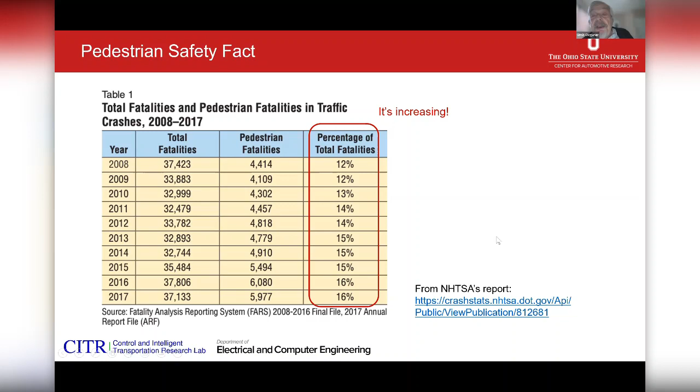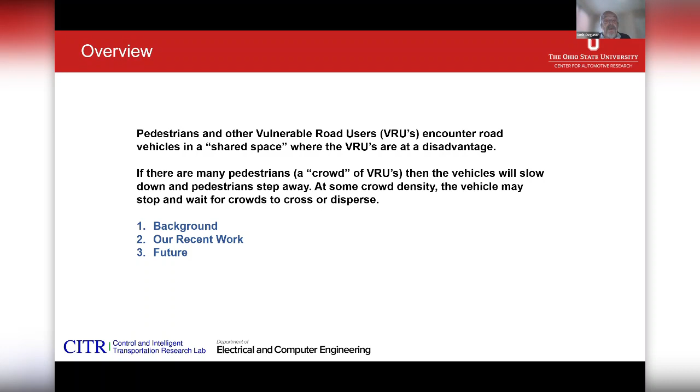Now, pedestrians and other vulnerable road users, VRUs, encounter road vehicles in what we call a shared space, where the VRUs are at a distinct disadvantage. If there are many pedestrians, a crowd of VRUs, the vehicles will slow down and pedestrians will step away. At some crowd density, the vehicle may stop and wait for crowds to cross or disperse.

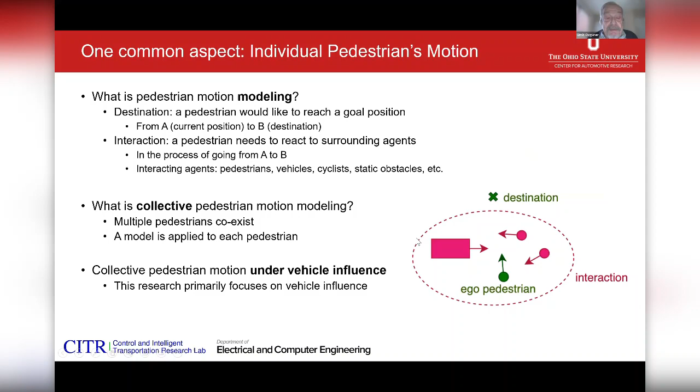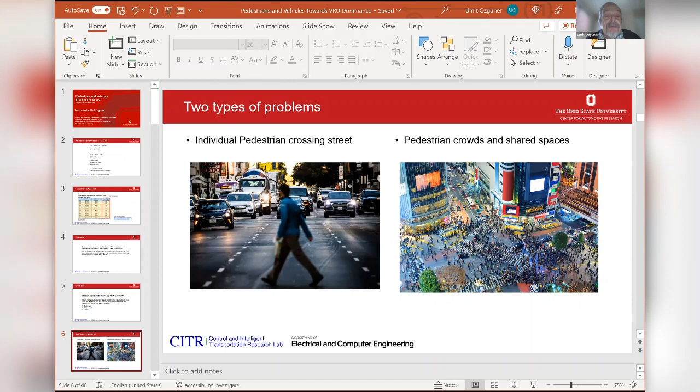Okay, this seems to be going faster than I'm talking. Is that automated? Interesting. We don't have any control over the slides, Umit. Okay. Apparently I don't either. Let me see if there's, okay. Oh, maybe I'll just have to keep in this mode. Is this okay? Can everybody see the slide? Yes, we can see it. Okay. Timing seems to be now in my control.

Okay, there are two types of problems that I'd like to address. Before that, let me go back one slide and say that the talk will be sort of three parts. I will have to go over some background work we have done and reported before. So some of you may, in fact, have seen some of the slides that I'll present, but it's inevitable that I have to rely on some of them to point out what we have been doing recently and my thoughts about the future. So after the background, we'll talk a little bit about our recent work, and then have a few thoughts about one possible future.

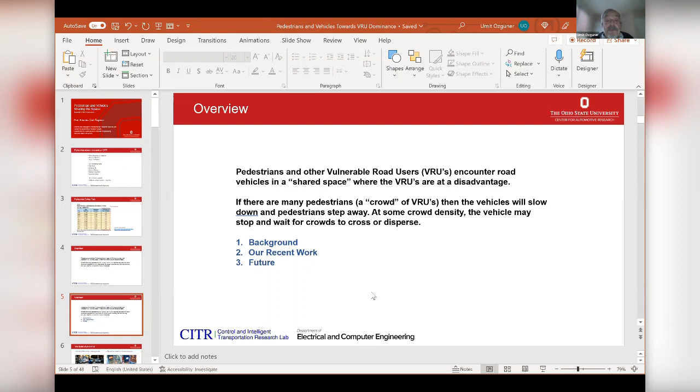Okay, I'd like to distinguish a little bit about individual pedestrians crossing the street type of operation, or attempting to cross the street with a lot of cars, and then pedestrian crowds in shared spaces.

In that picture on the right side, you see a lot of pedestrians, and it has even reached the point where the pedestrians kind of dominate the space, and the cars, which look quite threatening in the picture on the left, pushing the pedestrian to run across the street. But on the right-hand picture, it's the pedestrian's world.

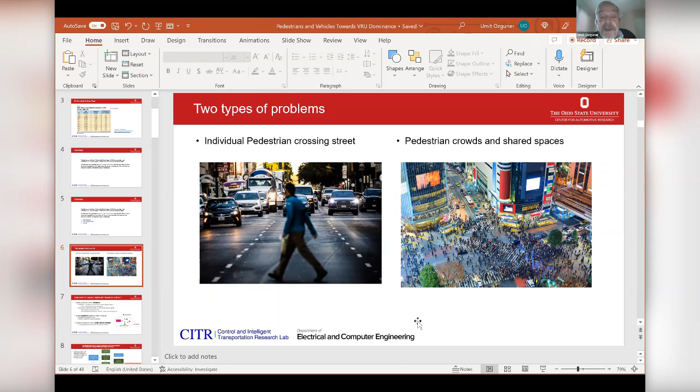So how do we get from left, and how do we solve the problems on the right, is a problem that we'll look at. So one common aspect is the individual pedestrian's motion.

We will be modeling a pedestrian where it will have a destination. A pedestrian would like to reach a goal position, and it will interact with not just the approaching vehicle, but also possibly other pedestrians that are moving with it, if there indeed is a group. So we'll look at what collective pedestrians' motion is going to be, and how that will change under the vehicle's influence.

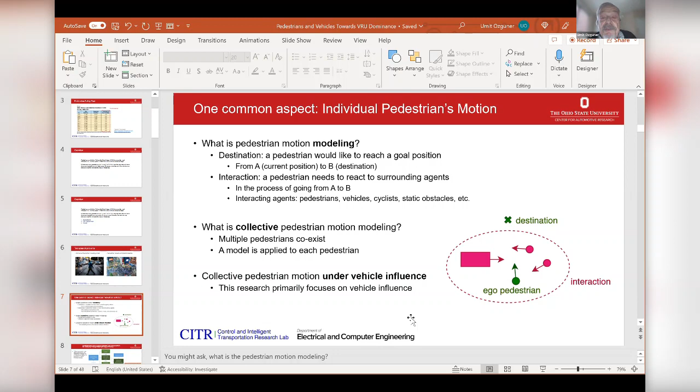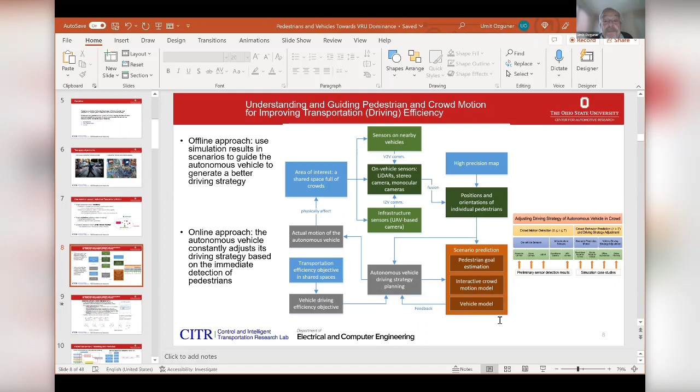Okay, again, this looks like a busy slide, but it's kind of a summary, and I'll address some of these in separate slides later on. One thing I would like to point out is this little figure on the top right corner, where we have one way, kind of a simplistic way of seeing the effect of a vehicle's framework sort of affecting the pedestrians that may be surrounding it.

We're interested in this because we're interested in scenarios where the vehicle, as you see in the sequence of figures, may be going into a crowd, that crowd having maybe one, maybe two destinations, and moving at a specific angle with respect to the vehicle and the vehicle's trajectory. Again, I'll give more detailed versions of this. This is just sort of a summary of where we're going.

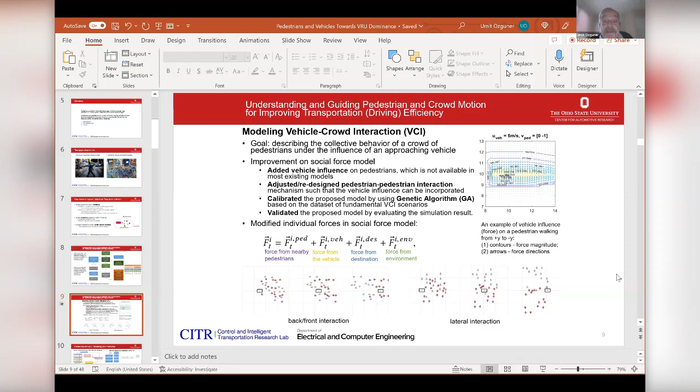Okay, the pedestrian's behavior has to be considered. There are various ways of looking at that. We can estimate its behavior using various modeling approaches, social force, or just online estimation and trajectory determination.

We can make assumptions about how one pedestrian affects another, and how, of course, they both are affected by the car. And you can see our model of the car here, and the model of the effects of the car on the pedestrian here, on this simplified figure on the bottom left corner.

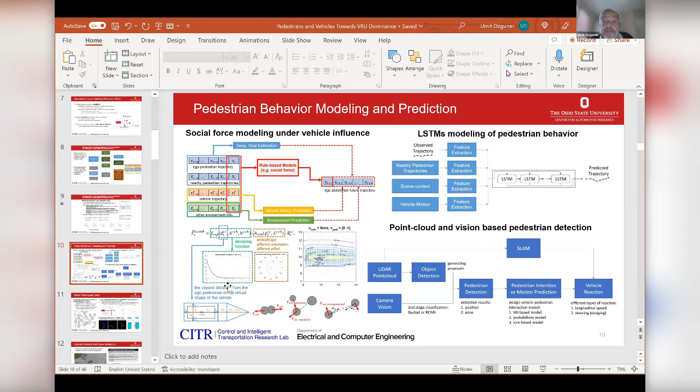Next comes the motion planning and control possibilities for the car itself. This may be different when we have a single pedestrian walking across our trajectory, or there could be lots of them, and we have to plan our trajectories accordingly, or just stop and wait. Again, I'm going fairly fast over these, summarizing earlier work, just to see what setup we have been considering.

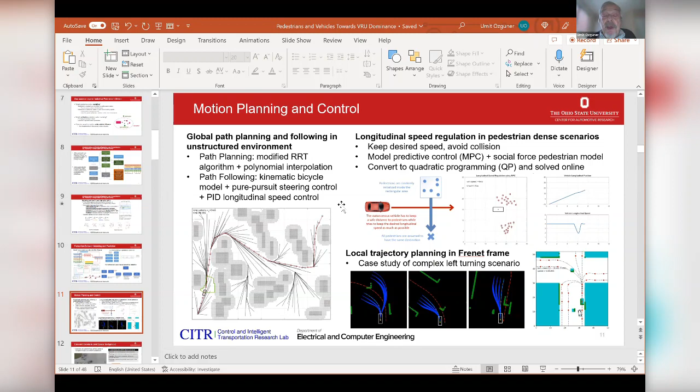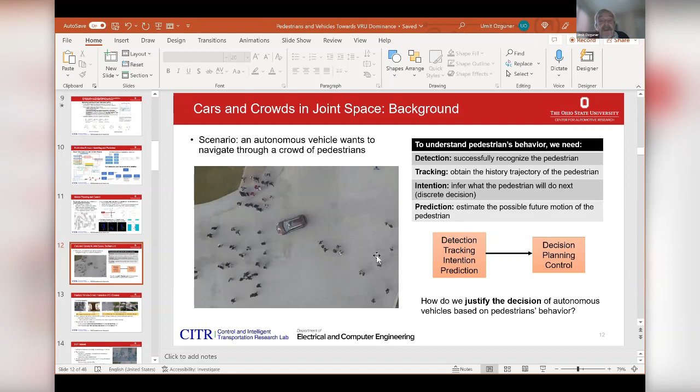We have had an interest in cars and crowds of pedestrians for a while now, and this has led us to try to get some data on such behaviors, so that we can take a look at data collected and decide how to fit dynamic behavior attributes to each pedestrian that's coming in front of us or near us as a car. So we have to do detection, tracking, intention prediction, and this will affect our control for the vehicle.

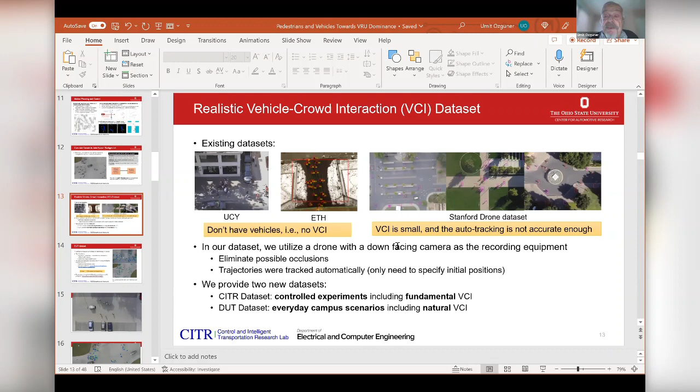Let me talk a little bit about the data sets we established. We established some data from experiments that we did in our backyard, so to speak. And then one of our postdocs that returned to his country in China from Dalian University of Technology did some data collection there and got us some nice trajectories that we have been using since then.

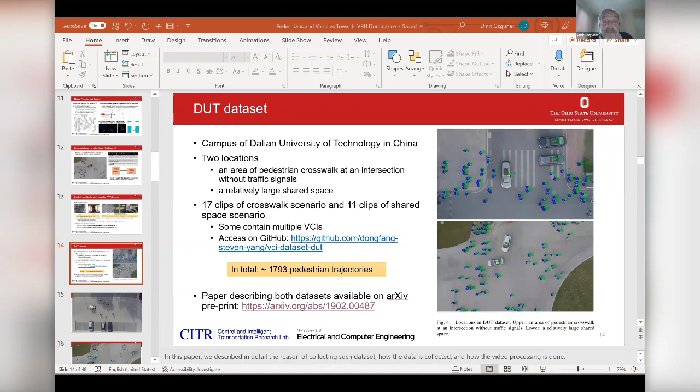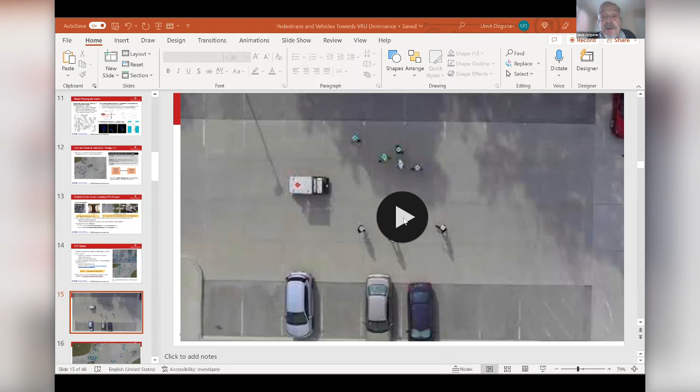With that, let me first show a little bit about the data set we generated at the Ohio State campus, in fact at the parking lots behind our lab, and hopefully this will work.

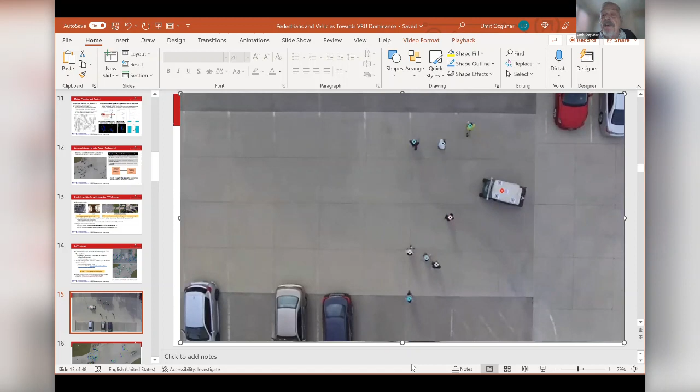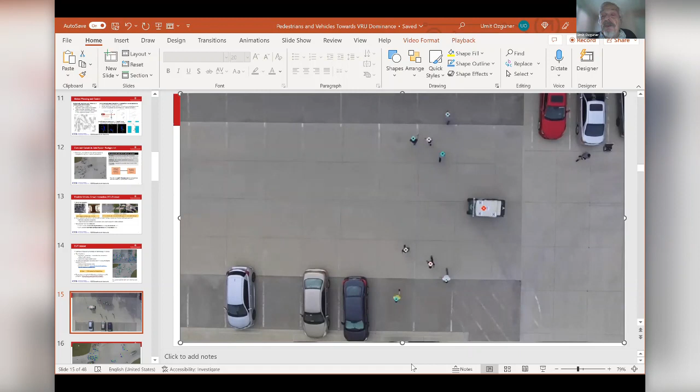These are all students from our lab and a vehicle being driven through them. You can see that the pedestrians sort of disperse as the vehicle is going through them. Now you may say that everybody's conscious that this is an experiment. On the other hand, there's nothing particular that will change their behavior from the natural behavior. So that was the type of data that we collected.

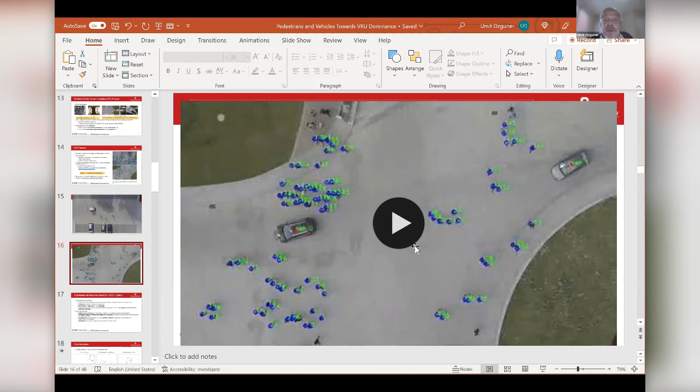Let me now go through the data collected by our postdoc in China. This is a more interesting case because the participant pedestrians are not coached or aware of what's going on, and there's a lot of pedestrians. One thing to observe is that the pedestrians almost dominate - there are some that step away, and there are some that don't and expect the car to slow down and wait anyway. So let's take a look at this group.

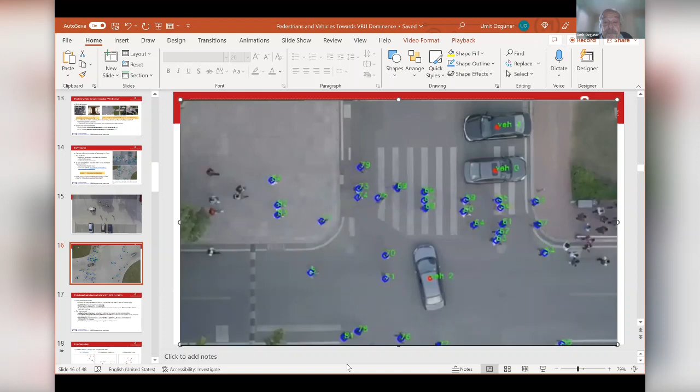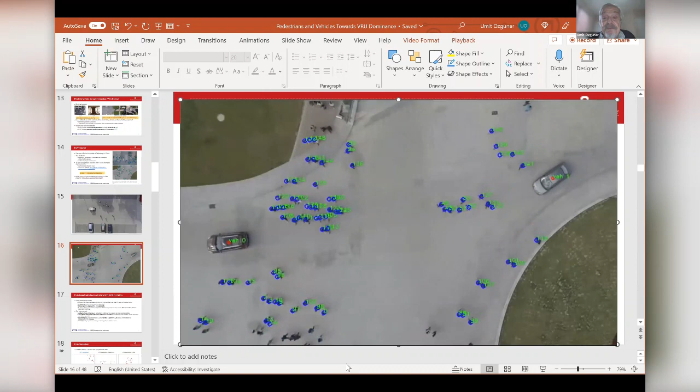You may even notice one case where one of the cars kind of moves away from the pedestrian. As you can see, the pedestrians don't seem to be too perturbed by having a car amongst them. Here's one where the car actually moves a little bit away, and here you can distinctly see that the car makes a slight motion away. Right there, yeah. Well, I always enjoy seeing these behaviors.

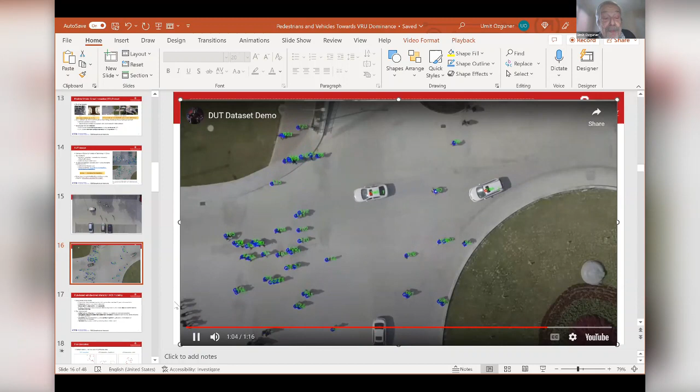Based on all of these, we can provide a social force model, as it's called. It's the origin of all other rule-based models, still popular after more than 20, 30 years of its introduction, and it's frequently used in crowd motion simulation. It has explainability, adaptability, and scalability, and in theory fewer parameters means less amount of data for calibration and training. We added the vehicle influence into that type of model, adjusted and redesigned the pedestrian interaction mechanism, calibrated it and validated it. This was done as part of the work we did for this UTC.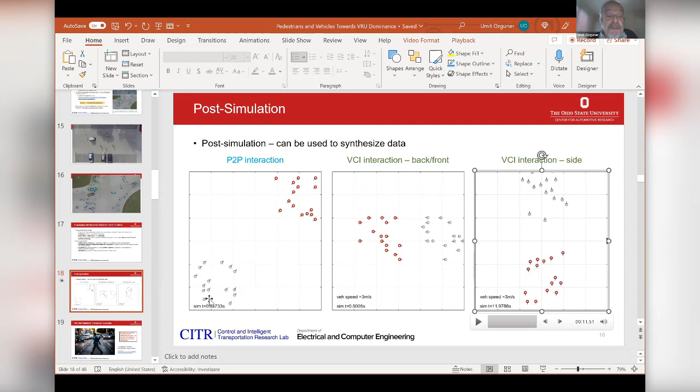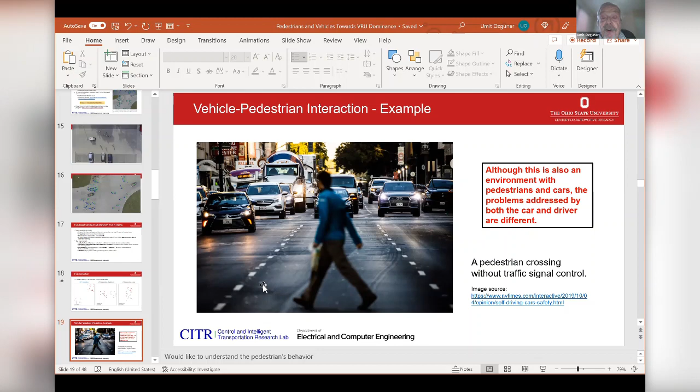Okay, now I'll step back and take a look at just a single pedestrian trying to cross the street and a bunch of threatening cars moving towards it. But of course, one has to start at the very beginning, which would be just a single car approaching a single pedestrian.

And the pedestrian is at the waiting area and has a destination across the street. There are sort of three phases of this operation: going to the waiting area, deciding to cross or yield, and then crossing the road.

It has to find the right moment to cross the road and has to hopefully make sure that it's not hit by a vehicle. This is from the pedestrian side. You can also look at the problem from the vehicle side.

We're assuming a longitudinal motion only, so there is no dodging. Avoid the crossing pedestrian, keep the desired speed as much as possible. So in the simplest problem, this is what we have to solve.

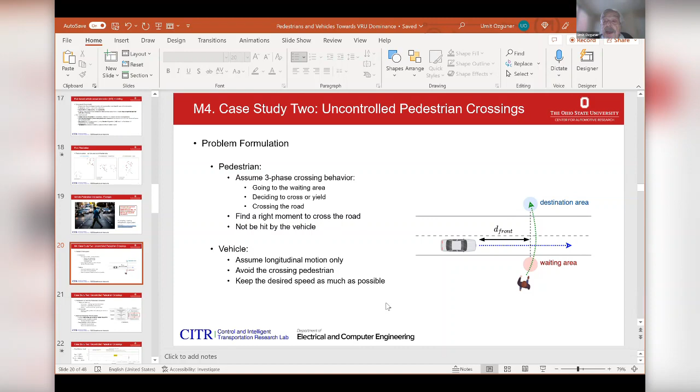So there is the framework for the vehicle pedestrian interaction that let's talk about first. We're considering a three-layer architecture: there's a perception, there's interaction, and then there's the motion. And you can see various things here from the pedestrian. The assumption is the physical states, position, velocity, are known to each other.

We use a modified pedestrian motion model called the multi-state social force model. We added a state transition module, crossing decision-making, and simplified the vehicle influence. So let's look at this little framework here.

From the vehicle side, it has to do a pedestrian motion predictor, has to do its own longitudinal speed control, and of course it is governed by the vehicle dynamics. From the pedestrian side, the pedestrian has to do gap estimation, assuming there's some distance that it'd like to see before the car is totally on the pedestrian.

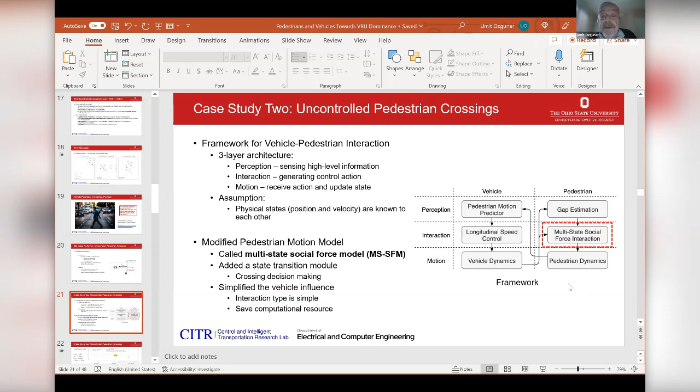If there is more than one pedestrian, then we have to do multi-state social force interaction. Would you be pushing the other guy away? Would you be following it? Would you be trying to hold hands, or what? And of course, the pedestrian dynamics governs what happens accordingly. So that's the general framework of crossing the street.

And we did a number of experiments. Let me show you sort of what is happening. Vehicles approaching and the pedestrian is crossing. And we have done a ton of variations of this, both from the vehicle standpoint and the pedestrian standpoint,

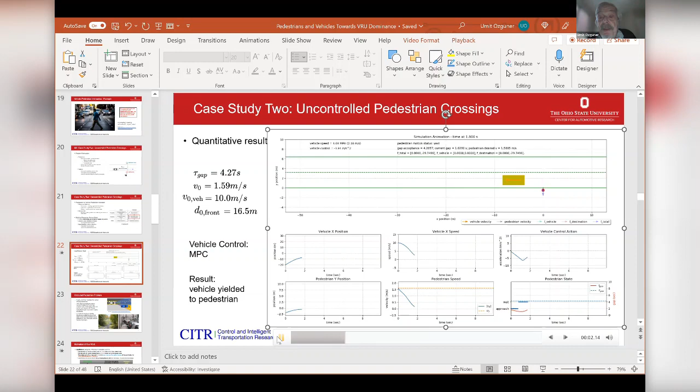and have observed various different types of behaviors. I'm just showing you a single pedestrian and a single vehicle. You can add more vehicles, you can add more pedestrians, and complicate things with multiple lanes and other threatening situations too.

Okay, a little background also on the occluded pedestrian problem. What you've seen in the couple of slides before this was pure crossing behavior. We do have what we call the occluded pedestrian problem also, where we don't know that a pedestrian may be coming. And this is quite a common situation.

One of the cases we looked at, in one of the many autonomous taxi test exercises going on around the world, we were involved in one of them, and there was a lot of concern there about occluded pedestrians that may be emerging from behind vehicles.

And there was especially one case that the car manufacturer was very concerned about: driving in front of a school, and that some small children may run out from behind cars. So that sort of affected our thinking about some of these problems. I'll return to that point in a little bit.

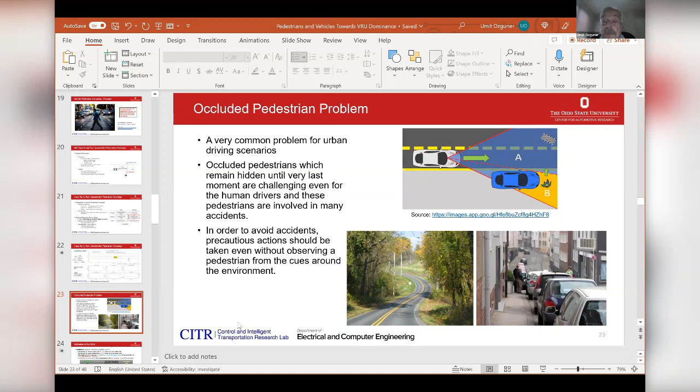So here is a problem that we looked at for a while. What should the automated car driving along the street do when there are a bunch of parked cars behind which pedestrians may be lurking? The density of the visible parked cars and distance to the closest one may be known. The density of visible pedestrians and distance to the closest one may be known. And the distance, if there is also a crosswalk, if it is visible, can improve the performance of the controller for occluded pedestrian scenarios.

And we deal with the emergent pedestrian problem, where you have to estimate the probability distribution that a pedestrian may emerge. Of course, this probability distribution may be unknown or not very reliable, and may be biased depending on the time of day and certainly the location we're at. If there's a school right behind this, whether there's a pedestrian crossing or not, the school behind certainly biases the probability distribution and our attention to it.

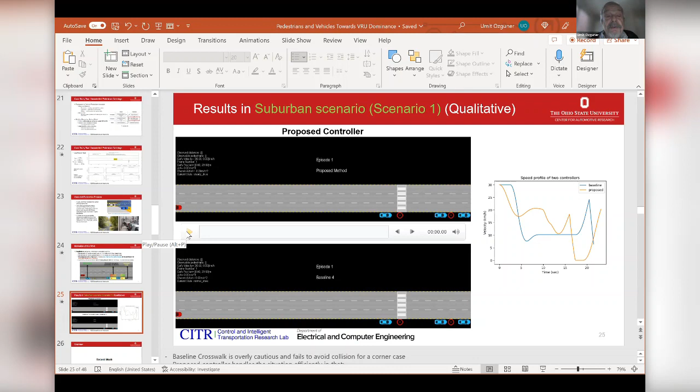So again, we had considered a lot of different types of controllers for the vehicle. As you can see, there's a little pedestrian here, not quite deciding to cross, and the car approaches at a pedestrian crossing, but it decides the pedestrian will not cross. But here, there's a pedestrian that didn't use the pedestrian crossing and decided to jump out onto the street anyway. In this case, we managed not to hit it and slowed down.

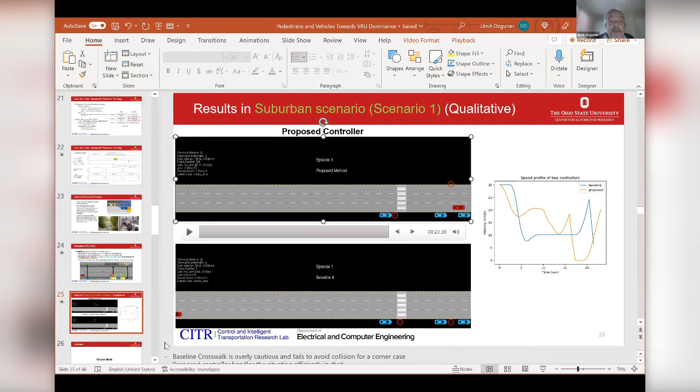Here's another episode. Again, our pedestrian is dawdling on the curb, and we decide this time to slow while we're crossing it, and obviously, this one I think we hit it actually.

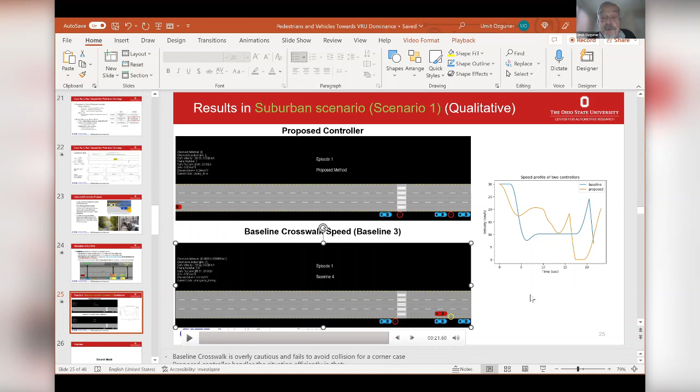So a lot of studies on these types of scenarios were done to decide on what sort of decision-making approach, based on probabilities and probability distributions that we know, the autonomous car should be taking. So that gives an idea of our background. Some of you may have seen some of that or read about it, and I felt I wanted to go over it because it shows you where we're coming from.

Now I have about three pieces of more recent work that I'll talk about. One is, you just saw a whole bunch of straight road driving issues. Another favorite of all of us is the intersection situation, and we've spent recently...

almost three years, I had a project from an insurance company, interestingly enough, that wanted to know if they inserted what they called a smart pole, which would have a camera, and the camera would see a pedestrian that was crossing and would send a warning signal to approaching cars.

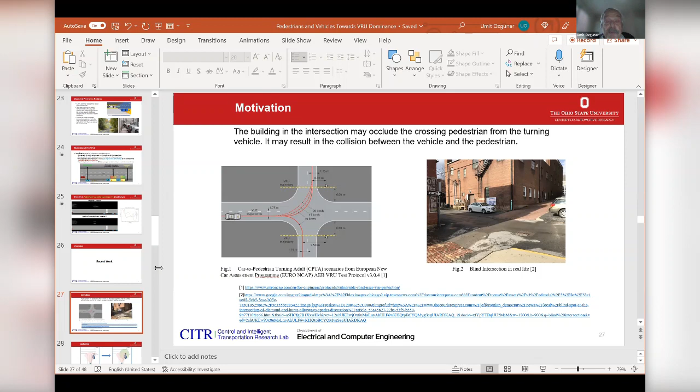So if there was a pole with a camera and a wireless connection, it can help, but we need to see what the variations could be in the vehicle's trajectory. Here is a version on the left, where we've shown maybe three of the possible trajectories turning left, and each one ends up slightly differently and may or may not hit the crossing pedestrian. This is also related to something called the car assessment program in Europe.

Okay, simplified cases. The car can itself detect a pedestrian crossing, or it may be occluded due to this building right there, where the car's sensors can't see a pedestrian that intends to go north. So if the car makes a fast right turn, it will run right into the pedestrian.

Or where you see the little star there, there could be our so-called smart pole that could have a camera on it and see the pedestrian that's crossing or intending to cross, and send a warning to our car that's approaching, or any other car for that matter, so that even though our car doesn't see the pedestrian as an impending threat, it will hear about it through the wireless connection.

There are many variations of this problem, and we looked at some of them and tried to find how much this smart pole and the technology could reduce the risk of hitting a pedestrian. I won't go into the details, but various bad things can still happen, including losing the wireless connection or the camera not detecting the pedestrian and so on. So we analyzed all of that for the sponsor and came up with an analysis of the risks, and how much risk—remember, this was sponsored by an insurance company.

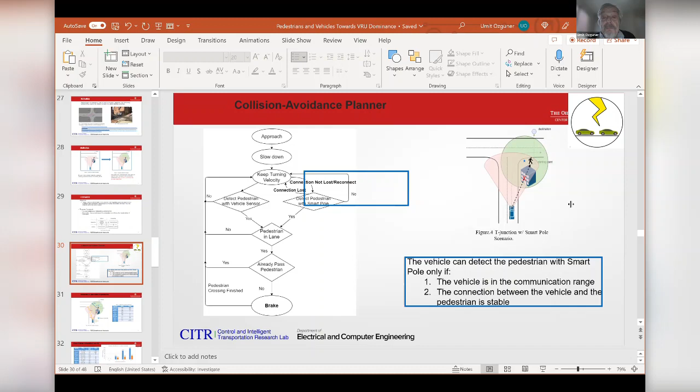Assuming they were happy with the results, we tried simulations - 108,000, almost 109,000 episodes that we looked at, and a certain number of these cases ended up with a collision. The numbers may not physically represent exactly what is going to happen, although 108,000 is a pretty high number.

But you can see that with the smart pole, the collision rate would be reduced by a substantial percentage. Whether it affects insurance is not what we look at - we just provide these numbers about how the collision rate is reduced, and whether that's enough to invest in this is a different question.

We looked at variations of the speed, the friction, variation speed of the pedestrian, and whether there's rain and all sorts of other variations to come up with 109,000 different episodes of simulation. We did build a special simulator for this.

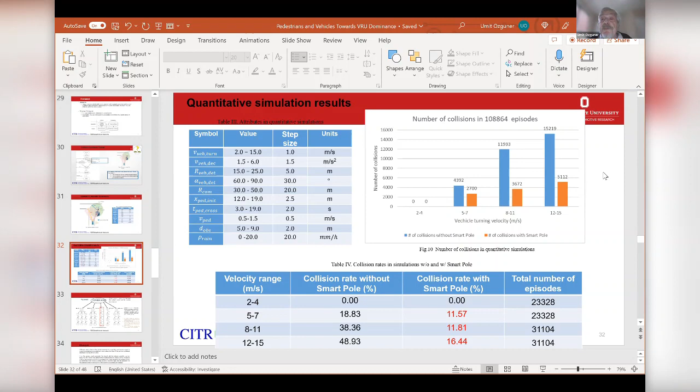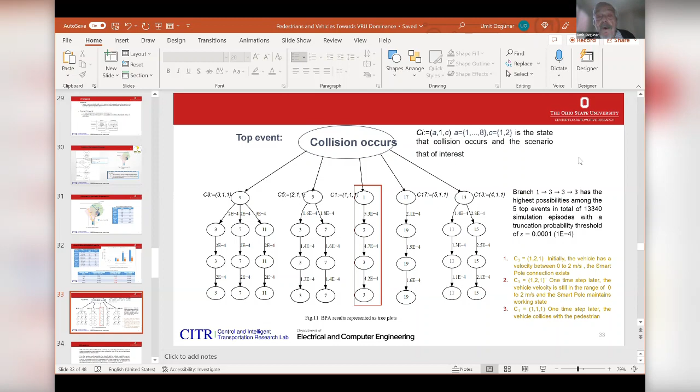I won't go into the details of the analysis of why the collision occurs, but we do have techniques to do that. Let me skip over that.

Of course, the right turn with the building in between is not the only scenario where this may become important. Here you see a couple of others - it could be turning left and not seeing this guy on the left side crossing the street from south to north, or it could be just blocked off with a truck that's crossing. If you are approaching without braking, as soon as the truck departs and you make a left turn, you may still be hitting that pedestrian. There are many variations where the same type of event could happen. I won't go further into that, but we do have our approach to analyzing it.

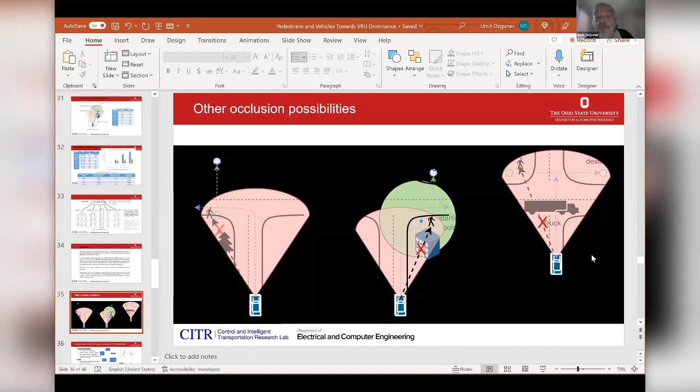Oh, I'm skipped one slide. Let me go back to that.

In all of these, one of the issues has always been what information is supplied by the system about jaywalking or other situations. So we started to look for a metric where the worth of provided information can be determined. We looked at an entropy-based metric to assess various things, one of which was accuracy of PNT information, but again, the important part is trying to find the metric.

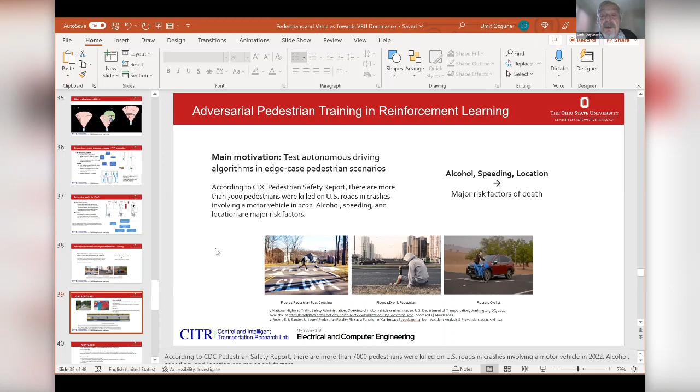But anyway, this is now a popular direction, and we wanted to look at whether adversarial pedestrian training, at least from the simulation viewpoint, can tell us something about how safe it is for our autonomous car to be driving. There has been work that's been done and is still ongoing about such pedestrians - how you can have adversarial pedestrians to test the car's autonomous driving for a worst case scenario.

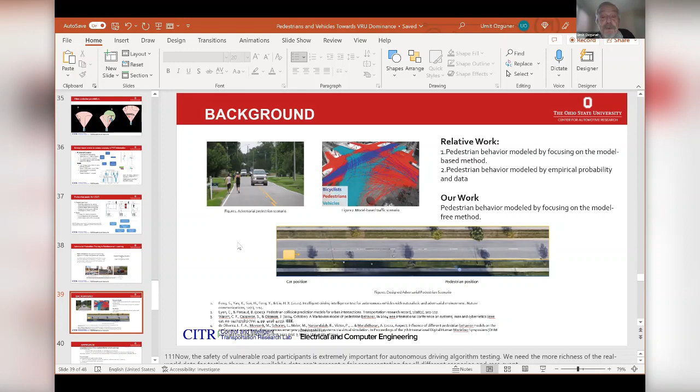I mean, what's the worst that can happen? Well, the worst that can happen is the pedestrian running after and throwing himself at the car. If you can make sure the car will stop even then, or get away, then you can sort of guarantee that your autonomous vehicle can work in this type of environment. So we're not aiming towards a real implementation, but just checking how fragile our autonomous decision-making mechanism is. That's still an ongoing learning approach for the pedestrian.

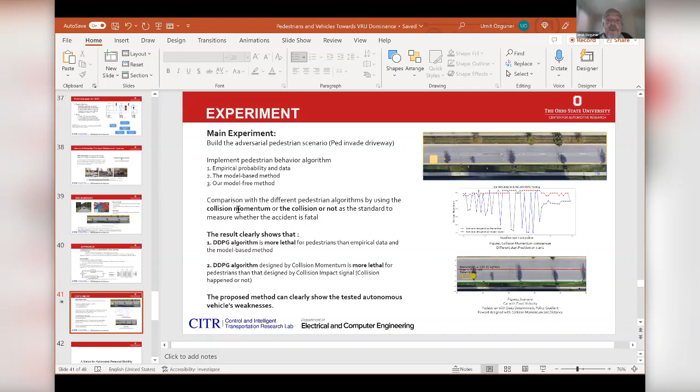I won't go into the details because my time is getting less and less. So let me switch over to say a few words about a vision for automated personal mobility. The title of my talk was Towards Dominance of the VRU, of the pedestrian. I'd like to throw at you some ideas I've been developing, and see if you have some reaction. So, a vision for personal mobility which satisfies a number of goals.

The claim is that you want to aim at reduced car-based traffic in the center of a smart city, operating without crowded streets of crowded vehicles, and easy melding with robot delivery related activity. Use pedestrian roadways purely if we want, and feed into larger automated vehicles on highways. There's direct utility for people who have mobility problems, and it can be used as fleets with door-to-door individualized service.

So I propose a 3-level radial hierarchy: the innermost circle has pedestrians and personal platforms, the second has platforms within vehicles that would be regulated in their activity, and at the outermost edge there'll be free flow of vehicles.

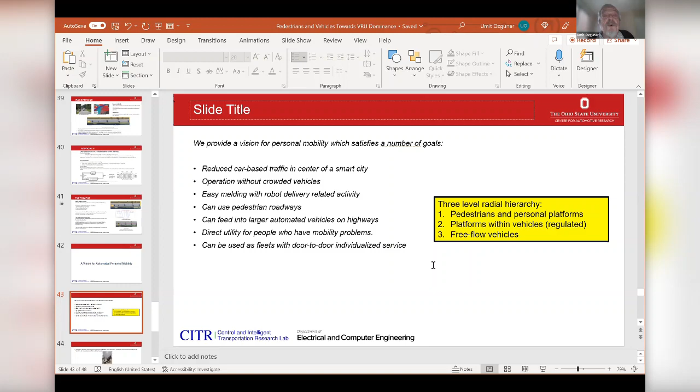So we can start with what I call an automated personal indoor-outdoor mobility platform, and vehicles for individuals with mobility issues can be used, or something like that. Here we see the present use of these types of platforms, where somebody elderly or having problems with mobility can call, and the platform can come to the person and take them, at this point, to a bus stop.

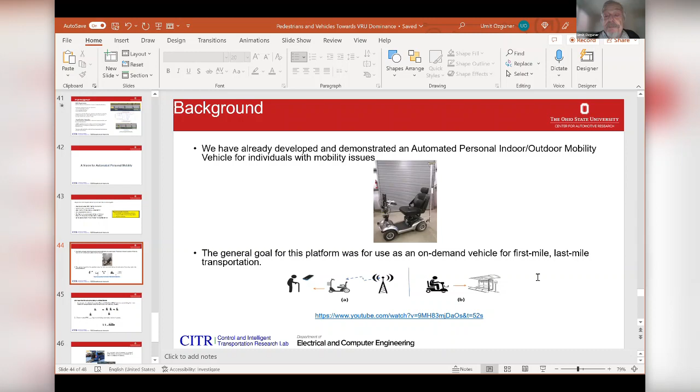The unified theme is you can have this inner circle of platforms that individuals can ride, or robots doing deliveries at the same time, using the same area. At the second radial layer, you can have these platforms entering vehicles that can carry them, which would be vans or buses. Even at this time, we have human-assisted mounting with ramps or lifts into such vehicles.

And then we can have single-person driving platforms themselves, which could be regulated, and we can show what the energy and fuel usage of such vehicles could be in transporting a certain number of people around.

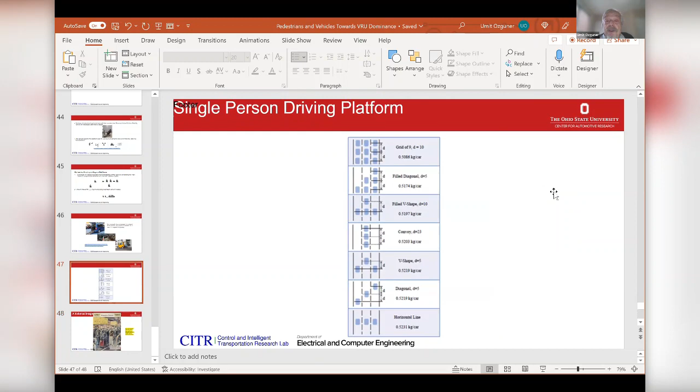Well, I'm not sure whether that refers to the stuff I said we've been working on, or to this last vision. It came in the earlier part of your talk, during the research. Okay, well, my last vision sort of answers some of those, because it came about when we were looking at various vehicles like these that can accommodate some mobility-constrained individuals.

That may answer that question, but certainly a lot of our research can address specifically different mobility constrained individuals' problems. The question specifically was about vision, of not being able to see the vehicles as they're approaching. Well, we have to use some technology. We haven't actually looked at that ourselves, but certainly there's enough technology around that one can focus on those types of issues.

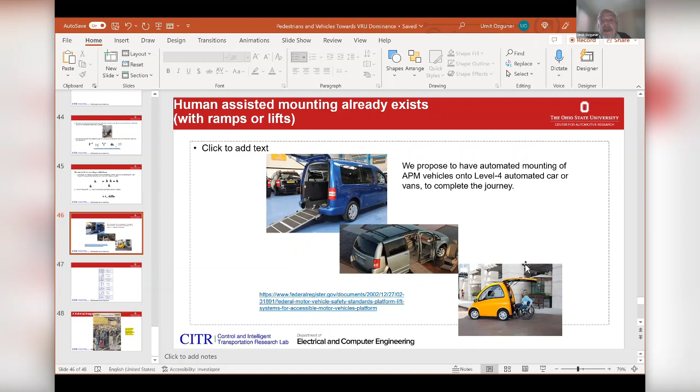In this case, which I'm showing, one can certainly insert technologies that can help the vision impaired. I was thinking more of the walking impaired people, but certainly any other constraints about mobility could be accommodated.

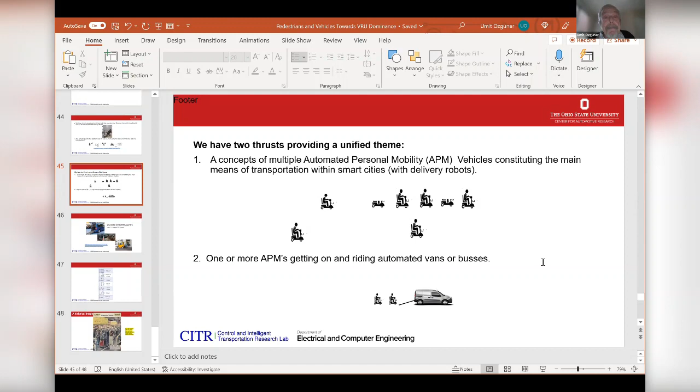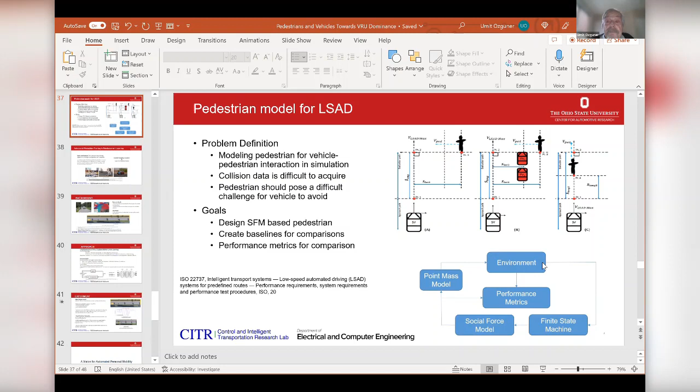So our next question is, how do you classify jaywalking? Communities that live on a collector road or even arterial sometimes have to paint their own zebra crossings for their neighborhood, which is often referred to as tactical urbanism, or have to cross illegally to get basic food and healthcare nearby. Should we blame the pedestrian in the first place, given that streets were designed before the automobiles came?

Well, that's a good question. Our whole research in this relies on having an estimated pedestrian emergence probability distribution. I think we can discuss that offline too.

There are two different problems here. One is the jaywalker's rights. Do we know anything about the emergent probability distribution of a jaywalker?

Are there locations where you're more prone to getting jaywalkers? In which case, you have to do something about it, whether it's that the probability distribution of somebody appearing in front of you has to be embedded into the vehicle's driving pattern, or there has to be other sensors placed so that externally some sensor can detect that there is a jaywalker and send a warning to the car. But again, having prior probabilities of emergent jaywalkers may help.